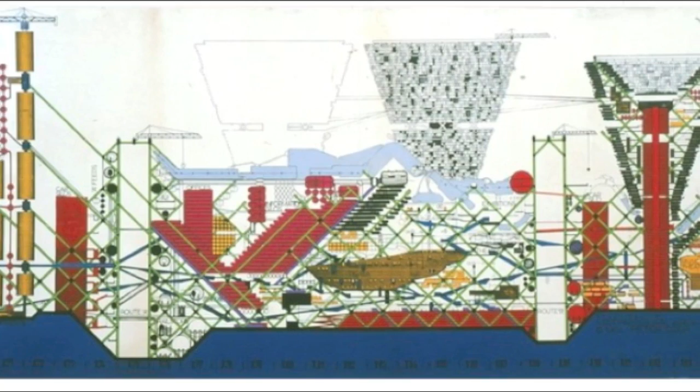Now, more than ever, speculations of the future are at our threshold. Archigram, the conceptual architecture group, has proposed the idea of a plug-in city, where large-scale projects are prefabricated and dropped into urban landscapes, connecting with existing networks. Like a spaceship landing on the surface of the moon, it can touch down anywhere, plant itself into the landscape, and survive within its own internal environment.

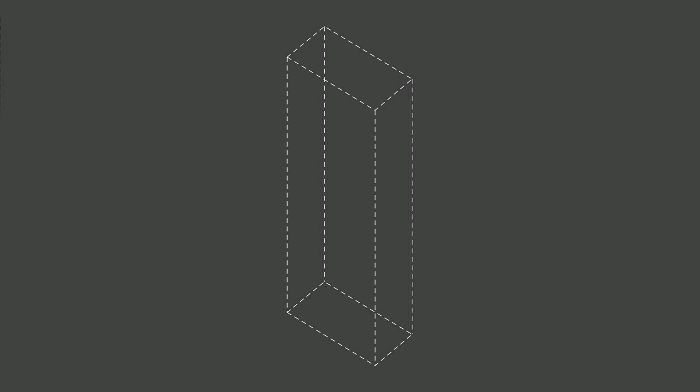It is believed that the HSBC Bank, designed as the ideal autonomous plug-in city, was a well-intended approach to create a fluid building that could withstand the evolution of time, specifically designing for change. This is the building's ideal conception. Foster's building was designed as an isolated volume.

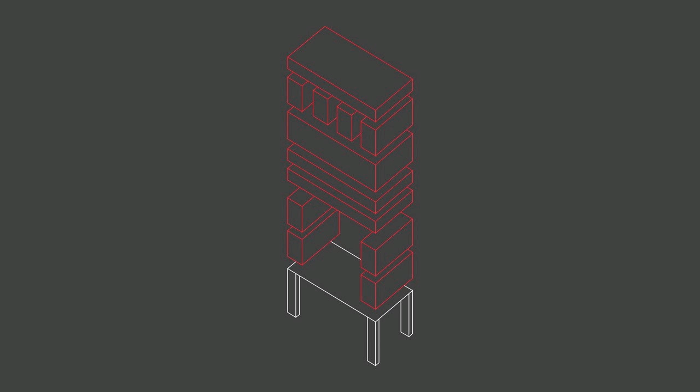Reflecting the idea of the plug-in city, mounting points attached to the landscape. A core is hollowed out of the building as a hub to connect to exterior networks. Prefabricated units define the programmed spaces in the building and its form. The systems and changeable structure create an envelope and shell of the building. Foster began an image of a city that is a kit of parts. Everything really stands alone and has its own place.

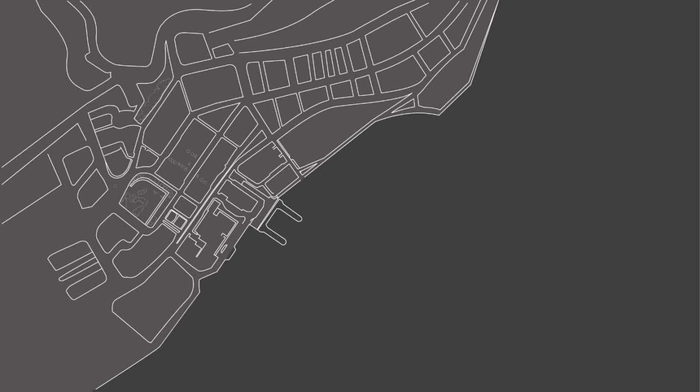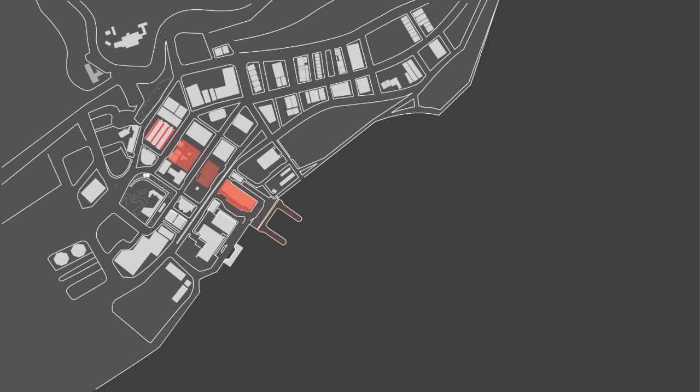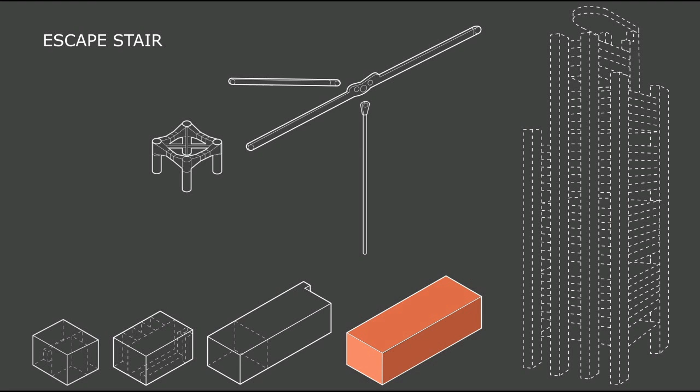Let's now fast forward to 1979. The building is designed as a prefabricated machine. Metabolic in design, its parts are industrialized and are dropped in and placed by cranes. The building is sectional, with its functions described directly with its form.

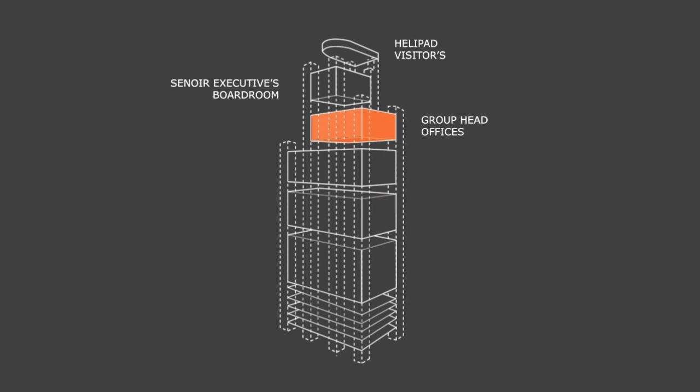It was almost sterile. I remember wondering what was so different about these washrooms and these offices that were prefabricated from the others I'd been in, other banks and offices. We still had cubicles, computers, desks, and windows around the edges. We just filled the space. It really didn't feel all that different, I guess.

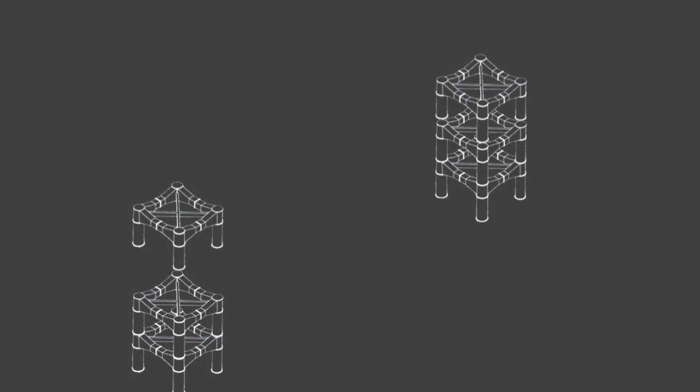The components all fit into the structure that was designed to allow more or less space as needed. The structure is all along the exterior of the building for the most flexibility, with hanging floors, walls, doors, and tension cables.

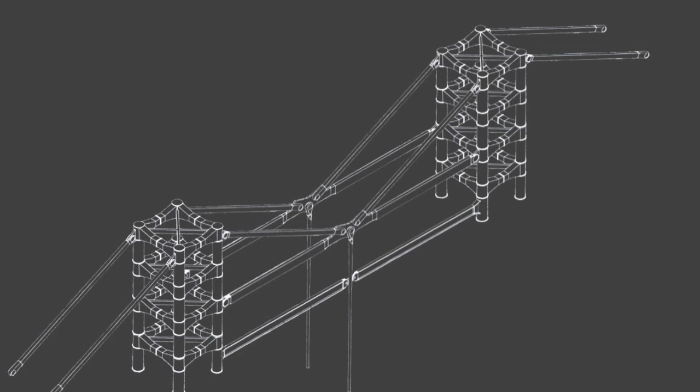There's a rumor the building can be completely dismantled and moved. Who knows, maybe one day it'll be across the street, or just completely gone.

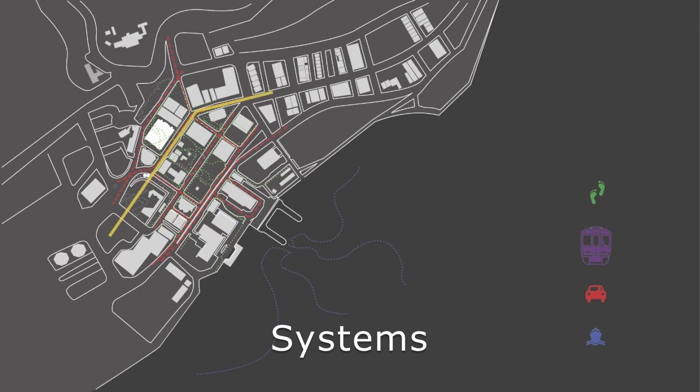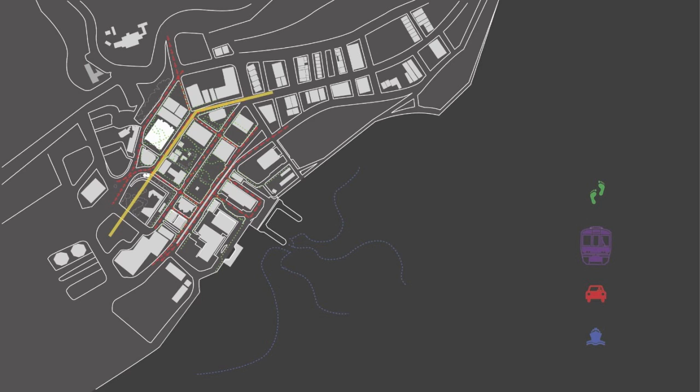How strange it is to think about Feng Shui and the HSBC Bank. It really doesn't reflect its surrounding environment at all.

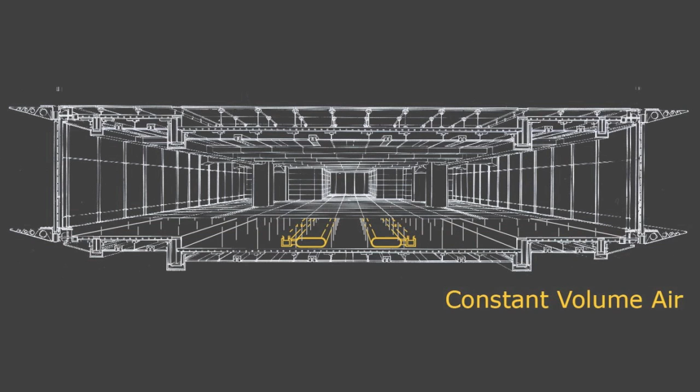All the mechanical systems surround the edges of the building and work as an overlapping of networks. Each is built into the prefabricated units, then connected to the surrounding units, creating a seamless manufacturing of the space that can grow with time.

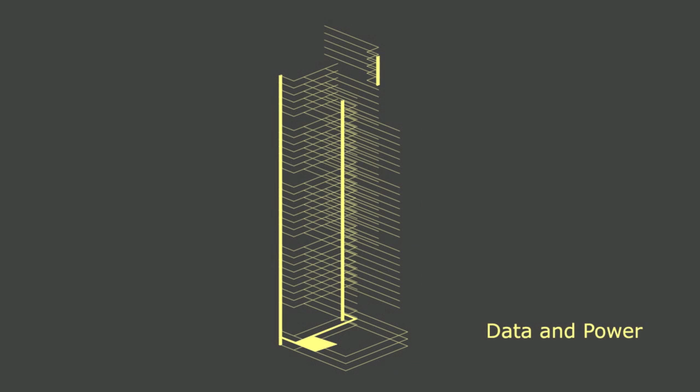The space can hold 8,000 to 10,000 people a day. It's like a small city, and with all the individualized control on every floor, it's like a town center itself.

Hold tight. We're now in the midpoint of construction, looking forward towards 1997.

Hong Kong residents are privately worried about the future. Prime Minister, on Wednesday you signed an agreement with China promising to deliver over 5 million people into the hands of a communist dictatorship. Is this morally defensible? I think you would have had great cause to complain had the government of Great Britain done nothing until 1997. And I believe that most of the people, indeed the overwhelming number of people in Hong Kong, think the same. You may be a solitary exception.

Houston, we've had a problem.

It's frightening, really. We were literally given away. It's demoralizing. I don't think we know how we can hold on to the identity we have right now as a culture.

Welcome to present day, an unexpected turn of events. An autonomous building is designed to hold up over time.

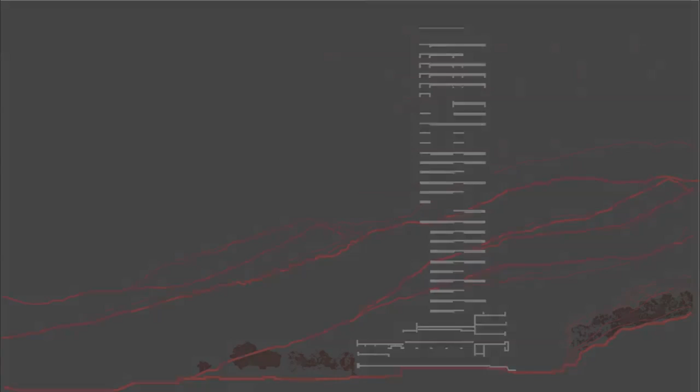The plaza is the heart of the building. Really, all of its open spaces are. The underbelly that looks up into the atrium is always busy. People move through, but it compels people to loiter, sit, wait, and experience. It's a busy space, really.

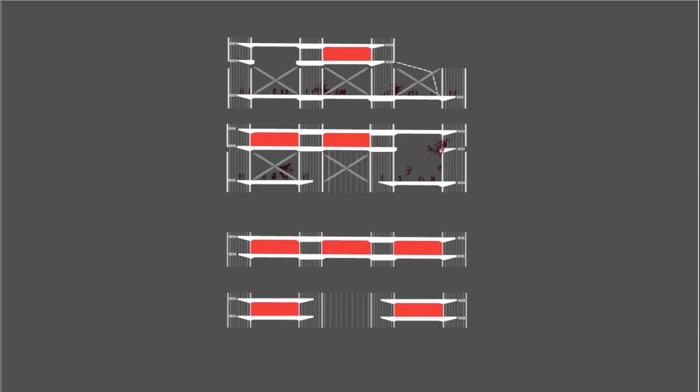The weekdays we see the businessmen rush through. In the mornings it becomes a ground for protests. In the weekends it becomes its own kind of market, with Filipino maids having picnics on their days off. It's like ants swarming an anthill. This is a rare thing for Hong Kong, to have open space, to have something so available. It's really valuable to us.

Welcome to the future, 2047. Let's take the next step.

It's one small step for man, one giant leap for mankind.

It was the building that was built for change, but in fact it's actually static. The only space that has ever changed and that truly extended the urban intentions of Hong Kong were the spaces that were not designed at all and left to be completely consumed by the public.

I don't think I've ever seen the face of the building change. In fact, it stayed the same. The structure, the appeal, the look. The only thing that has actually changed consistently are the people.

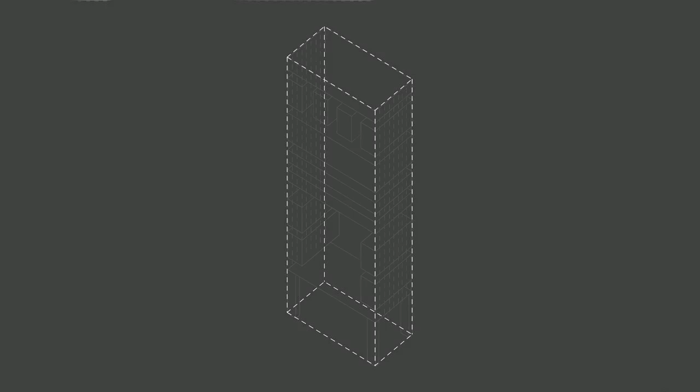Norman Foster's Hong Kong Bank, designed as an autonomous plug-in city, was a well-intended approach to create a fluid building that could withstand the evolution of time. But having a building that is just a shell is perhaps the most important thing for Hong Kong.

It is in the open fields that we see the most change. No expectations, just space.

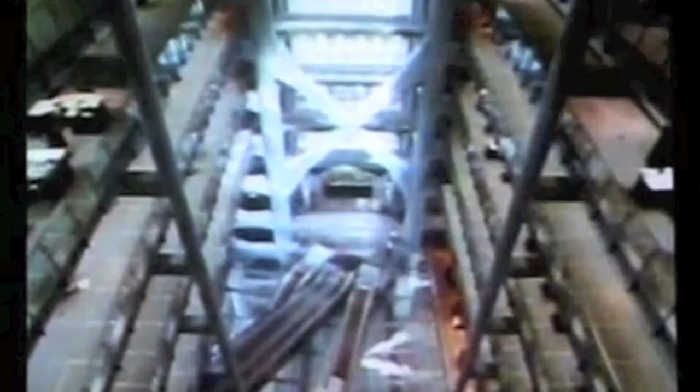Here is the human. Here is the human. Here is the perfect human. We will see the perfect human functioning. How does such a number function? What kind of thing is it? We will look into that. We will investigate that. Now we will see how the perfect human looks and what it can do. This is how an ear looks. And here is a pair of knees. And here a foot. And here is the reality.